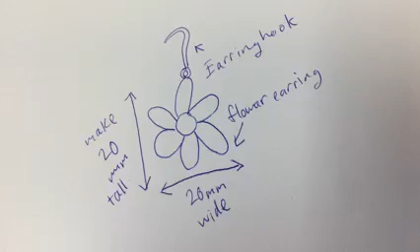Included in the kit is also a ring sizer tool and a ring sizing chart. Use the included ring sizer tool to measure your finger to see what size your ring should be. Fold the ring sizer tool, then put it around your finger and pull the tab snug, and you'll see—for example, I'm about a size ring 10.

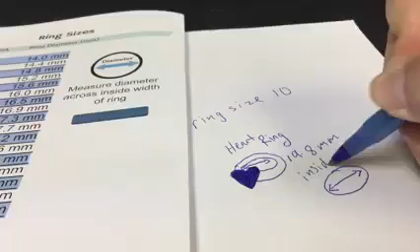Now that I have my ring size, I can look and see what diameter my ring should be. The diameter for a ring size 10 is 19.8 millimeters. This means the width from one inside edge of the ring to the other inside edge should be 19.8 millimeters to fit a ring size 10. This will be useful when we are creating and designing our ring in 3D printing software.

Here is a list of 3D design learning resources from places such as Tinkercad, SketchUp, Fusion 360, and more. For this design, we'll be using tinkercad.com, a great resource for beginners. You will need to create a free account on Tinkercad, or sign into your existing account, to proceed. Children under 13 will need parental or guardian approval. Click the Learn tab in the top right corner to learn how to use Tinkercad.

So I'm going to create my design, and I'll start by renaming this design to flower earrings. I'm going to start off using a very simple shape, the cylinder, for the inside of the flower.

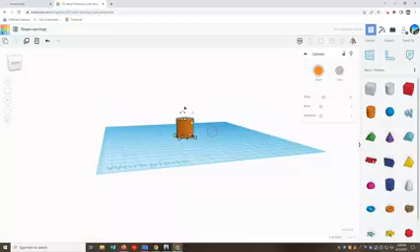Now I'm going to start adding and shaping the petals. You can see Tinkercad is a very simple, easy to use online software that uses drag and drop technology to create simple designs that can be 3D printed.

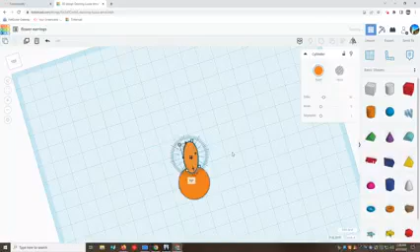You can use the white squares around each shape to modify the scale of your object.

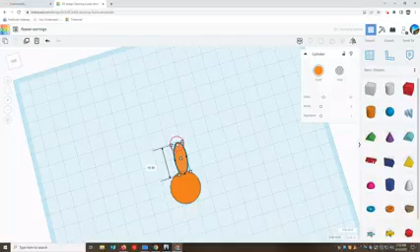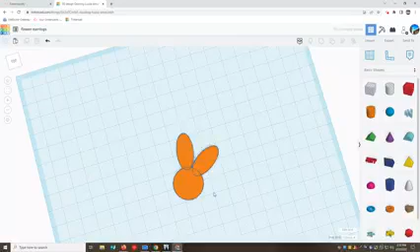Now I'm going to simply copy this petal, and I can do that by hitting Control C to copy and Control V to paste. Then I can move around the petals until I have a complete flower.

So as you can see, now I've completed the base of the flower earring. I'm just going to modify a few details, like making the center more raised from the petals. And of course, because it's an earring, I have to go ahead and add a little attachment so that I can attach my earring hook to the flower.

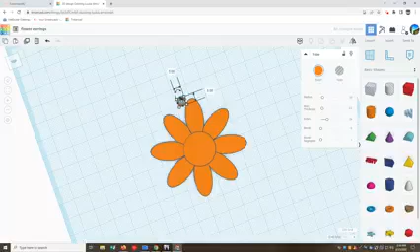So I'm just going to use a small little circle and make sure that it is at least 2 millimeters in diameter so that the earring hook can fit through the hole.

Looks pretty good. So now I'm going to go ahead and draw an outline and group it all together so that it stays in one piece.

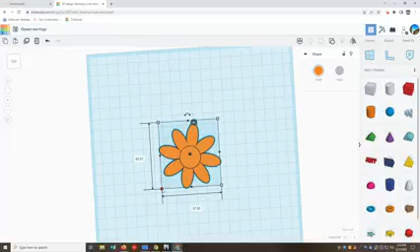Now I'm going to size my earrings so that it matches my original sketch. My original sketch, I wanted it to be 20 millimeters long, so I can type that right in there, by 20 millimeters wide. Now that it's sized accurately, I can go ahead and make a copy of the same earring—again, Control C to copy and Control V on your keyboard to paste.

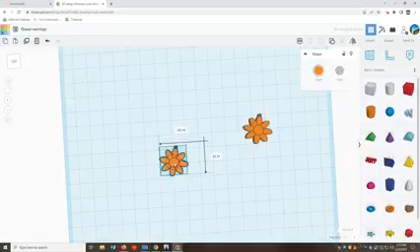Step 4: Save your 3D design file. Select both of your earrings, click Export, and click on STL, which will save your 3D design file to your computer or device.

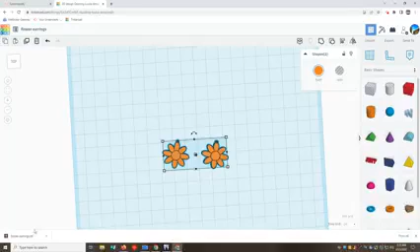Now I'm going to start designing a ring. Remember, my ring size was 10, which was 19.8 millimeters in diameter. So I'm going to change this circle—or I should say cylinder—to 19.8 millimeters on each side.

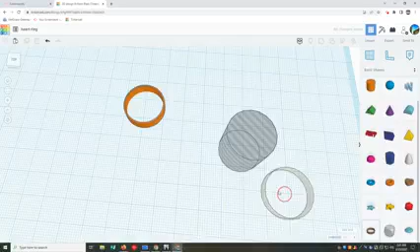Then I'm going to drag and drop the ring onto my screen, and I'm going to see if this cylinder, which is 19.8 millimeters in diameter, is going to fit inside this ring. I'm going to resize as necessary so that the diameter of my ring is the same size as the diameter of my cylinder.

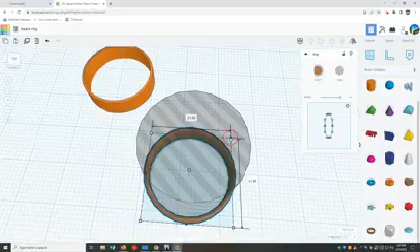Now that I have my ring the right size, I'm going to go ahead and delete that cylinder. And now I'm going to start putting a little bit of design onto my heart ring.

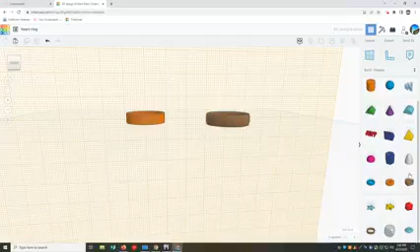So what I'm going to do is drag a plane onto one of my rings so that I can transport the heart straight onto the surface of the ring. I'm going to resize the heart as necessary and put it flush against the surface of the ring.

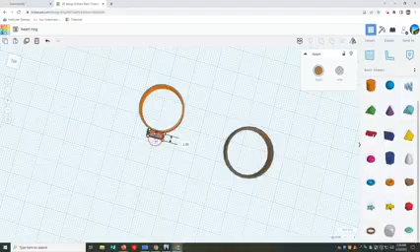I'm going to finish up the ring, and then select all items of the ring and group them. After I group them, I can export the ring as an STL file, and that is what I'll be using to print my jewelry design.

Step 5: Get ready to print. Email your STL file to Ukiah Library at mendocinocounty.org, and we will print your design for you.

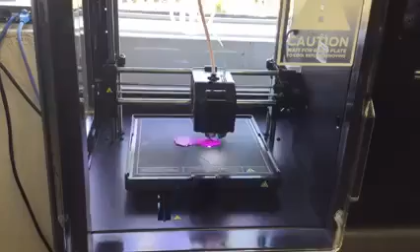Here we have a time-lapse video of the 3D printer printing the flower earrings that I designed. Most designs can print in about half an hour depending on the size of your design.

And here is the finished product complete with earring hooks. And here is the finished heart ring complete with a little paint job. Thank you for watching and happy 3D printing!